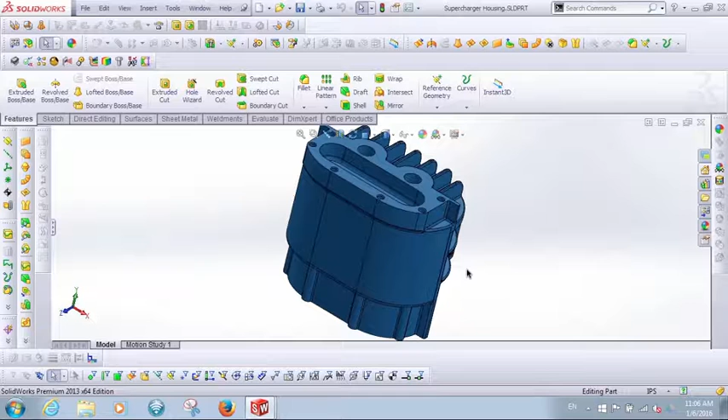Let's take a look at an example of how easy it is to build a simple fixture around a model that was built inside of SOLIDWORKS. In this example, the engineering department has modeled a housing for a supercharger. Now the file has been sent to the machine shop, and a fixture needs to be designed for machining.

Importing the part into Onshape couldn't be simpler. Select the Import Document Files icon and browse to the file you'd like to import. Onshape can even import the native SOLIDWORKS file sent to me by engineering. Some examples of other formats supported are STEP, IGES, Parasolid, Creo, Inventor, and a number of others that allow you to easily work with vendors using nearly any 3D CAD.

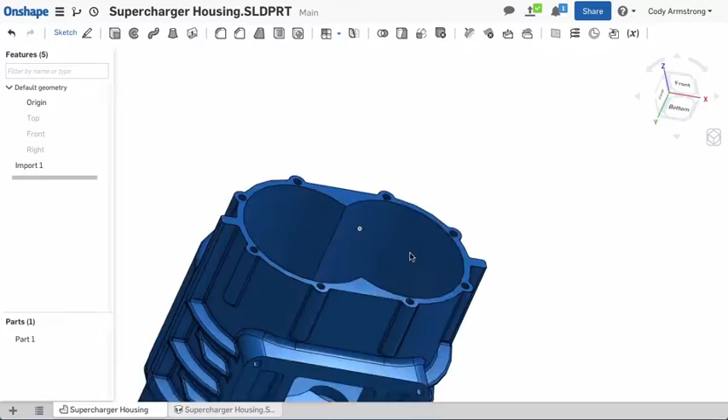The first thing you notice when importing a file into a document is that it's immediately visible. Onshape automatically translates the file and gives you instant access, all from the browser. In addition to the tab for the translated part, Onshape also provides a tab for the original imported file. This means your imported file is backed up securely in the cloud and can be downloaded whenever you need it.

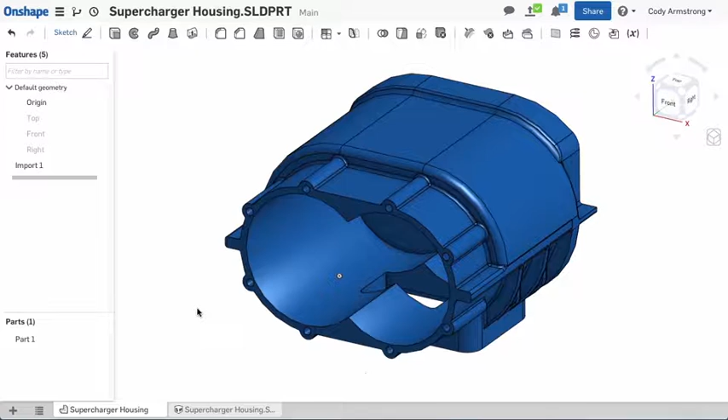So if all you're looking for is a simple way to back up and view your CAD models, Onshape will work well for you. But of course, it's capable of much more. Onshape is the first and only professional-grade 3D CAD tool that runs 100% in your browser, giving you instant access to a full suite of CAD tools without an install.

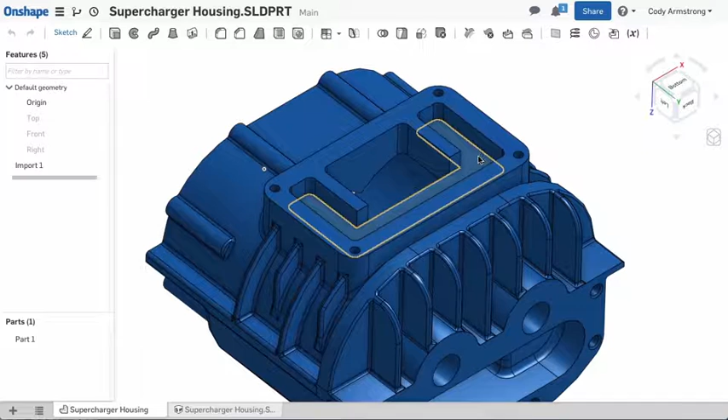In my example, I've imported this housing for a supercharger and I need to design a fixture for both machining and final assembly. Using my imported part as a reference, I can begin work building my fixture. Onshape's part studios allow for multiple parts to be built together, making it easy to reference existing edges or faces for my design. I want this fixture to locate the part with this pocket and these 4 holes.

With 2 clicks, I can use Onshape's offset command to offset the entire face. Now that the first sketch is complete, let's extrude. We'll extrude this up to the face of the housing and select New to make it a new part.

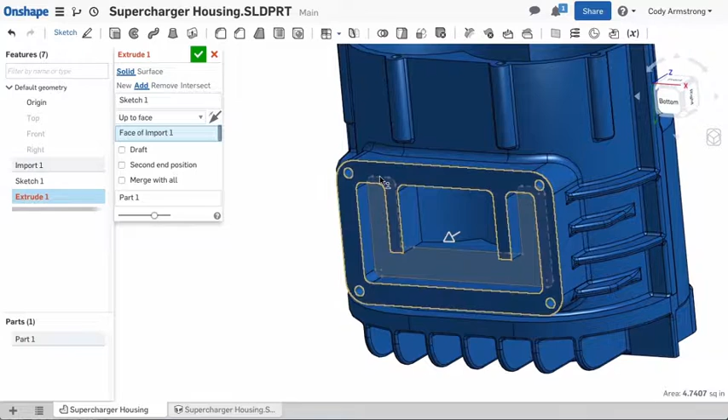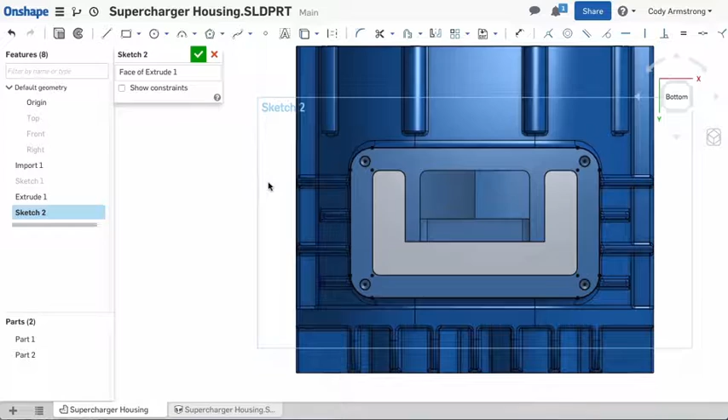Now that we have the boss the part will locate on, we can add a rectangular boss to bolt the part. Here I can utilize Onshape's Use command and convert the rectangular face to sketch geometry. In addition to converting the face, I can also convert the individual bolt holes as well. After we finish this up, we can extrude to a blind depth of 1/4 inch.

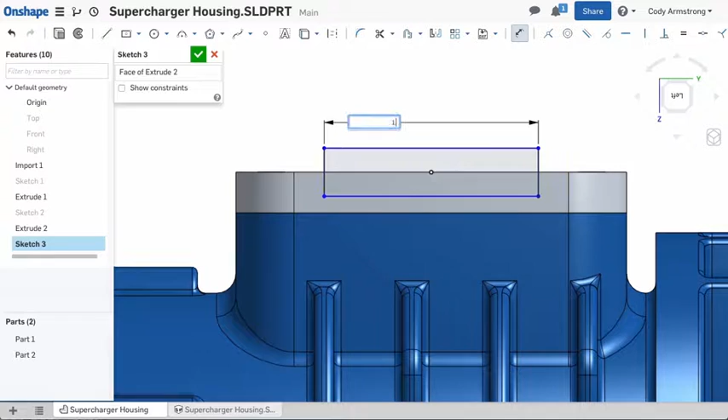The next step to modeling my fixture is a dovetail feature needed to mount this to the machine. I'll sketch a center rectangle and add a few dimensions. Then draw in a line for the dovetail, dimension, then mirror. Now that this feature is sketched, we can extrude.

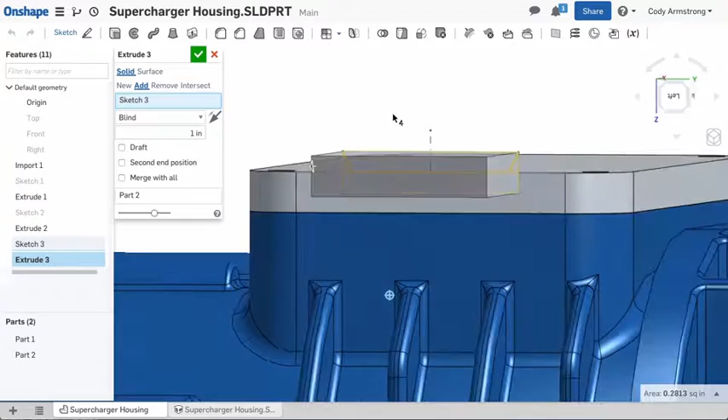Notice within Onshape, I'm not concerned about trimming sketch entities or having a single closed contour. In Onshape, you can use the entire sketch or any piece of the sketch as a reference for your extrude. I'll extrude this up to the opposing face, and we're nearly done.

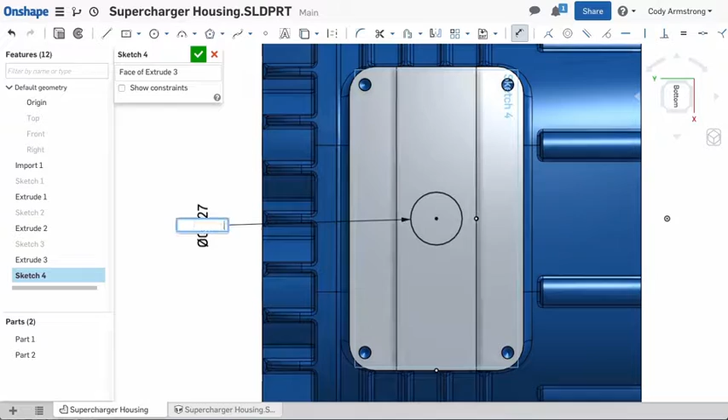The last step is a dowel hole to help locate the part. Notice I can wake up both midpoints of this face and center my hole in the part without sketching any construction geometry. Create a cut with a blind depth of 1/4 inch, and our fixture is done.

Before we can sign off on this fixture, I need to make sure it fits in the machine and that there are no issues with parts colliding. To accomplish this, I'll assemble my fixture with a simple model of my milling table and 4th axis. Simply import the models provided by my machine vendor, and we can assemble.

The first step to any assembly is inserting the parts. Notice with Onshape, all the parts of my milling machine can be inserted all at once. Many of these parts are fixed and have no need for motion in my assembly. For them, Onshape has the Group command.

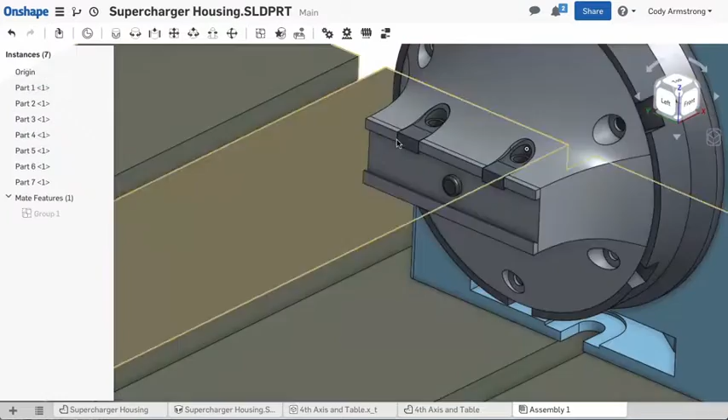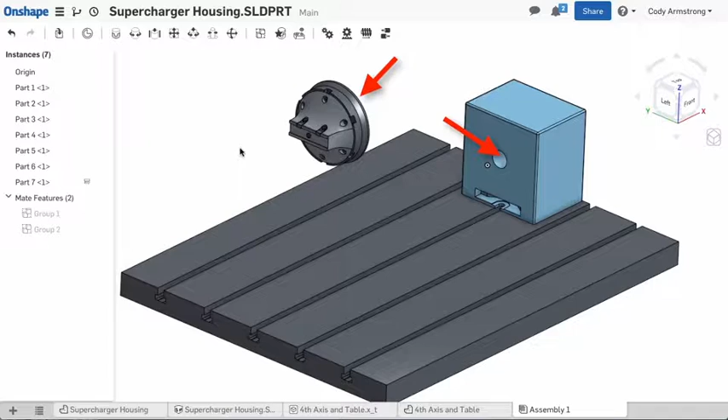Now that we have these parts grouped, we can add our mate. Onshape uses a higher level system of mates that's a bit different than traditional CAD. In a traditional CAD application, this might be 2 or 3 mates to correctly locate the spindle with the 4th axis body. With Onshape, this is 1 revolute mate. Simply select a mate connector from the body and a mate connector from the spindle, and it's mated in place.

Notice when I grab and rotate that the one revolute mate attached the spindle to the base, but still allowed for rotation. The last step for this is to insert my fixture and finished part.

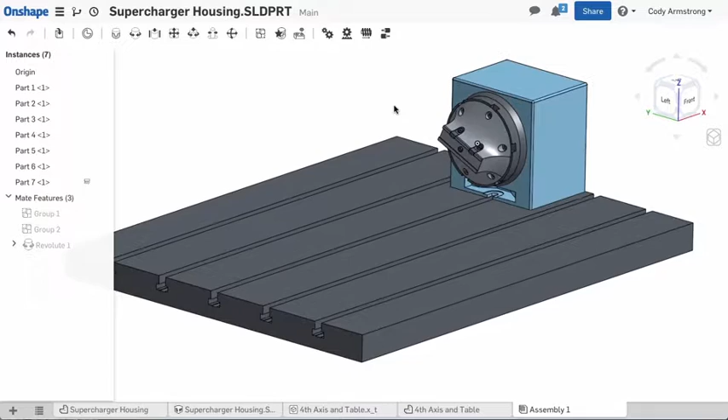Again, I'll select the Insert Parts command and browse to my Part Studio. Insert the fixture and part into my assembly and group them. Now I want to attach this to the fourth axis. Again, in a traditional CAD application, this might be a combination of 2 or 3 mates to correctly locate this part. With Onshape, it's one fasten mate.

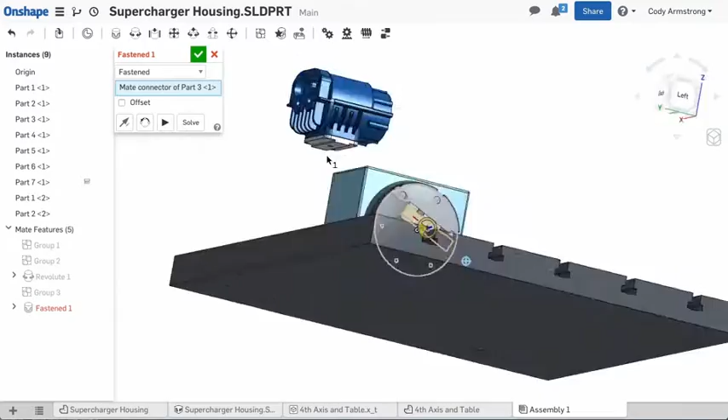And just like that, my assembly is finished. Now it's easy to rotate the fourth axis and check for any collisions with the table.

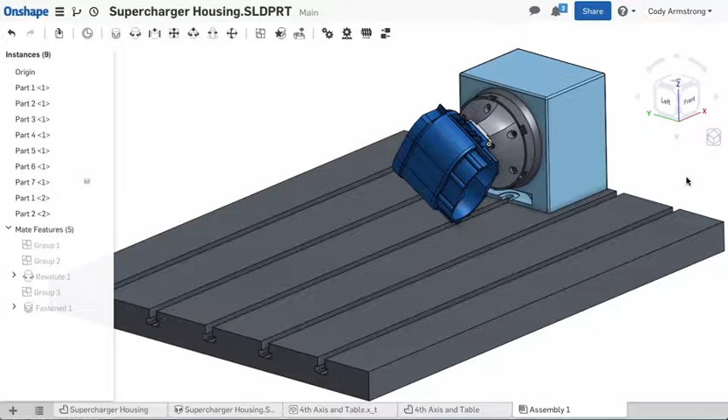So we've modeled the fixture, assembled it with our machine, and tested it to make sure that it wouldn't collide. So I think it's safe to have this fixture manufactured. For that, we'll need to create a drawing.

Onshape drawings are just another tab in your document. Simply select the Create Drawing option from the Create tab menu in the bottom left, select a template, and Onshape creates a new tab for your drawing.

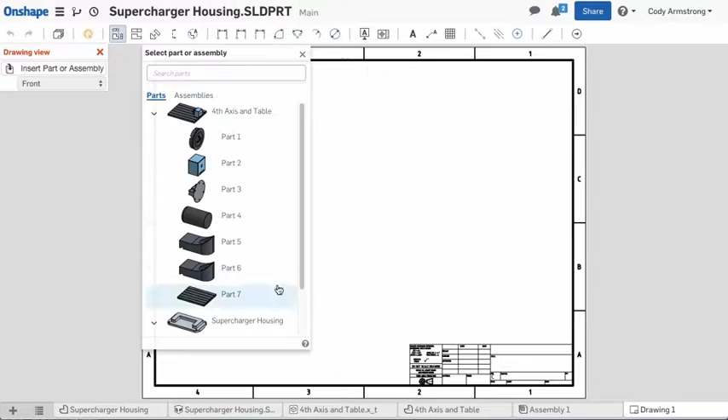Now that I'm in a drawing, I can insert views, add dimensions and annotations to create a detailed layout of the fixture for manufacturing.

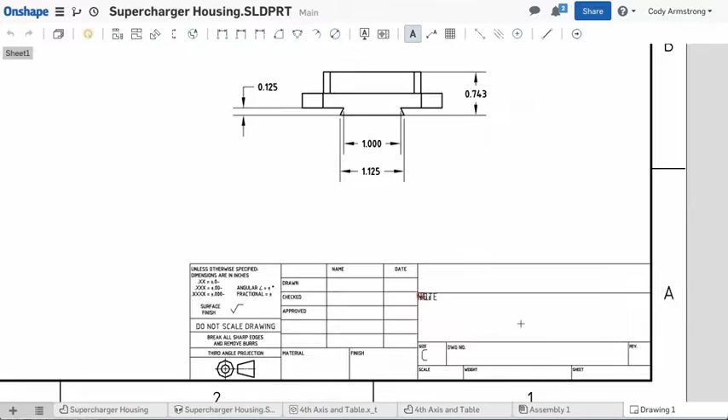Before I finish, I'll share this document with my colleague on the shop floor. This makes it easy for them to view the model and drawing from their workstation or mobile device without having to email files back and forth.

My drawing is complete and the prints are on the shop floor. Before I move on, I want to make sure to create a version. Version control is built into the core of Onshape and makes capturing major milestones like this easy.

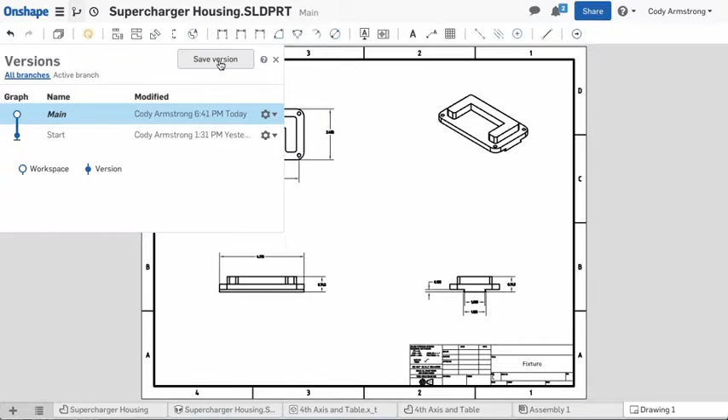From the Versions Manager, simply select Save Version and type in a name. This version is a read-only snapshot of the entire document. This makes it easy to go back and look at a revision at some point again in the future.

So we've taken you through importing parts for my customer, as well as building parts in Onshape. We've tested for collisions by assembling them with parts from our machine vendor, and we created a drawing for the shop floor to make our fixture. All this accomplished from a simple web browser.

At Onshape, we know our users work in a multi-CAD world, and we're building Onshape with the flexibility and simplicity needed to work alongside any CAD system.